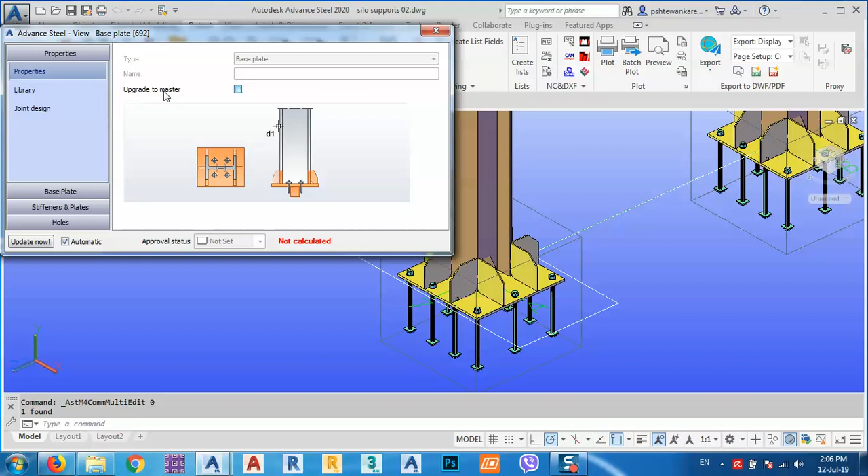In the previous lesson I forgot to remove the middle bolts, so if I change this one and upgrade to master, I can modify this joint from the parallel type and remove the center bolts. You can just click here and remove the center bolts.

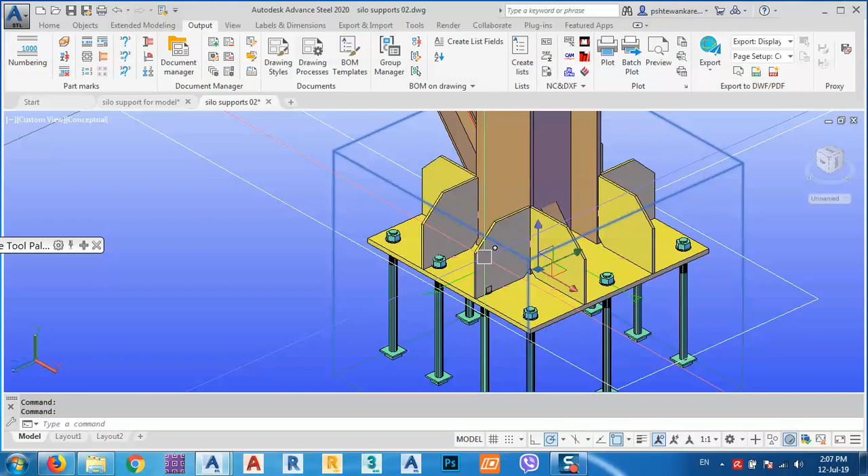We have some other mistakes. For example, I put only 2 plates here, but we need 3. There's nothing in Advance Steel to make this automatically, but you can do it by double clicking, removing these 2 plates, and placing other plates. We can do it later, it's no problem.

For this one, let me make these connections and show how. We can go to connection vault and use the one we need, which is from the platform beams.

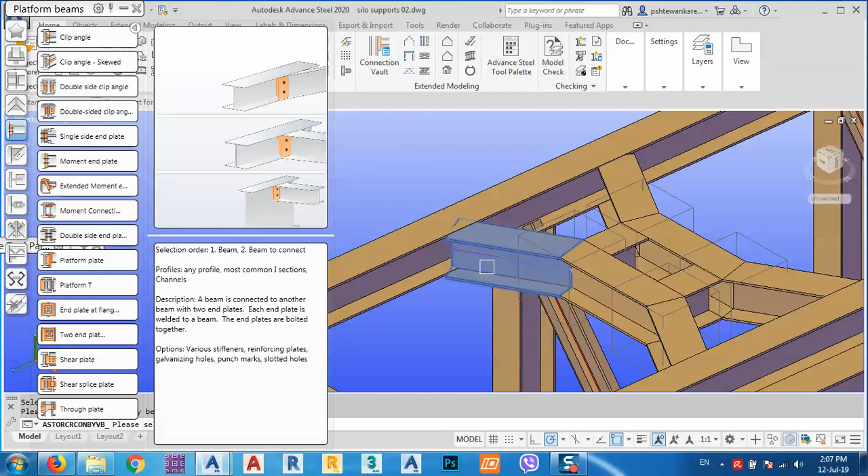We need the platform plate. You can just select this one and select the second one, but be careful because in the previous lesson we put on group selection.

Let me show you. When you click this one, it will select all the groups. In this situation you cannot make connections - just click here and here and it will not connect anything.

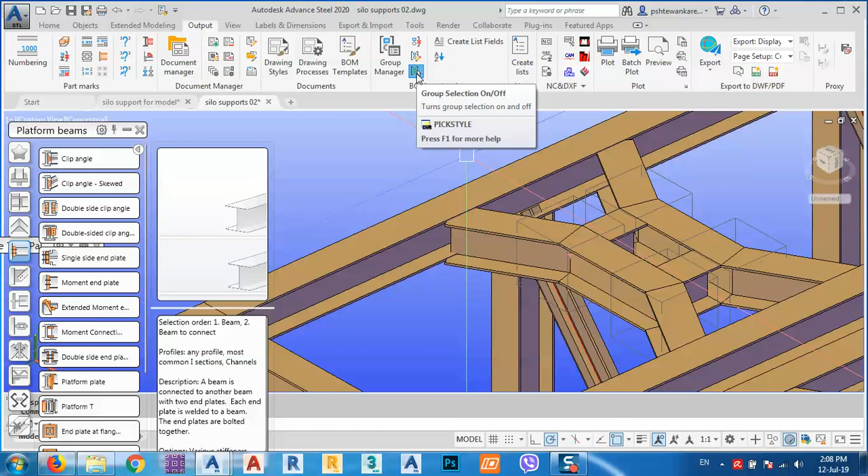So we have to turn off group selection, and after that you can go to platform plate, select this space and this space also.

After that we have to select this one. For example, the thickness is 12 millimeters, the bolts and holes grade we can set to 20, and we can select the bolt type - we can use UNI or any kind of bolts we want.

After that, horizontal bolts, its projection - we can see totals. So the width of the plate, or we can just use projections.

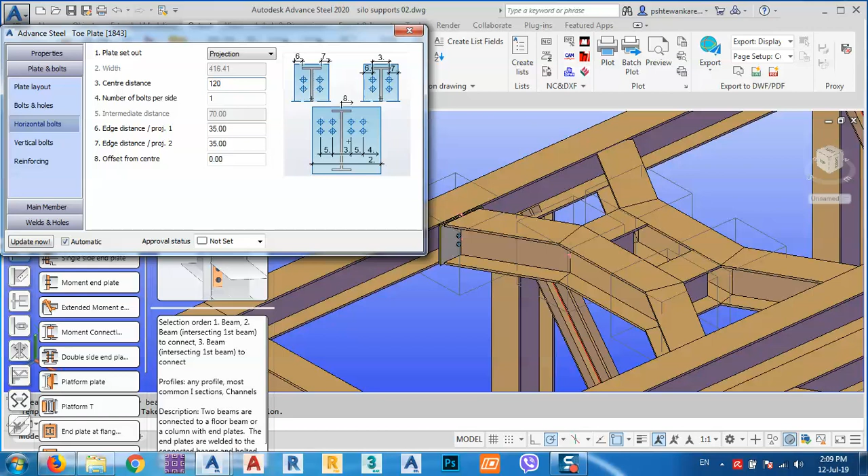This is the difference between the center distance - 75, maybe 120, or any other distance, maybe 200, I don't know, it's up to you, it's up to your design. And the edge distance is maybe 40 by 40 on each side.

From vertical bolts I want to put it in the center, and we have main - you see here we have 10 millimeters. I want the main to also be 12 millimeters.

And minus 25, we can change it to 0, or if we want 5 millimeters for welding, we can put it inside - sometimes you can put it inside, it's no problem.

You see these stiffeners. After that, from the end plate, this plate thickness is 10 millimeters, I think it's okay.

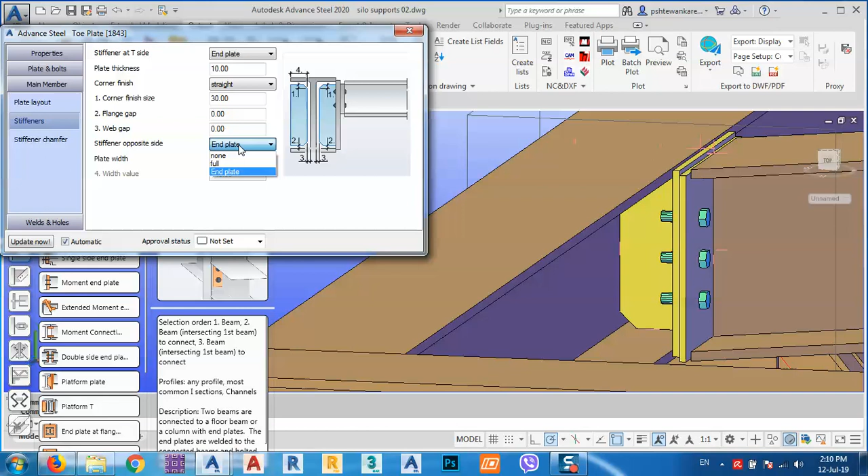Flange gap, we have stiffener opposite - we have too many things, and stiffener chamfer. If we want to give it a chamfer, we can do it. I think that's enough to discuss about it.

This is the plate layout with this plate. As you see in the picture, we can make it slotted holes or whatever we want. Here we have projections, we can say totals.

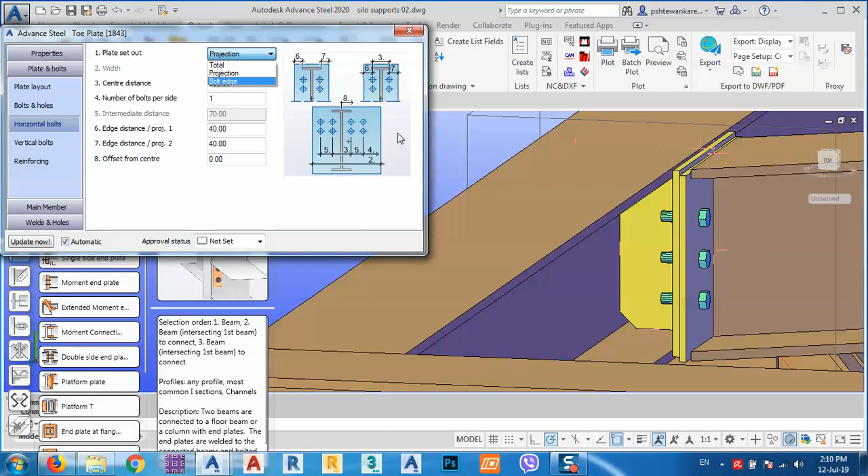If you see the projections, here we have 40, but we can make it 0 and 0 so it fits with this beam and line. Vertical bolts also, there's nothing to discuss.

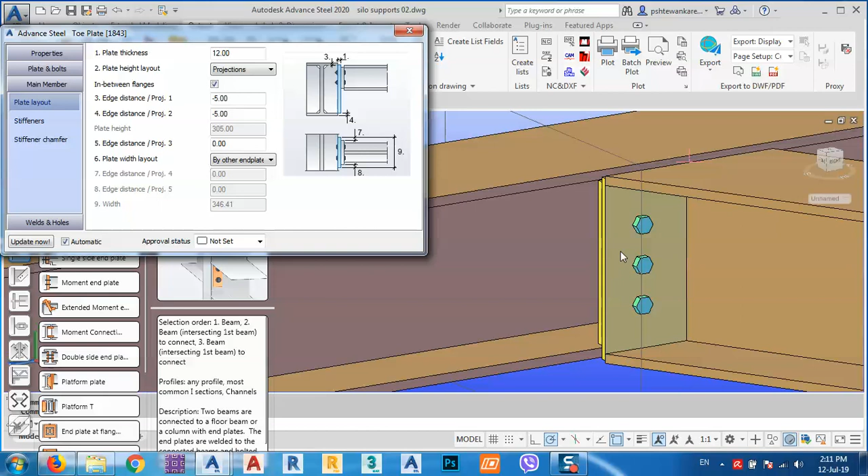After that we can go to the reinforcing group. If we want to make some washers, we can put them in between flanges - you see this small one to be between these flanges like this. I think our example is just like this, and this is okay.

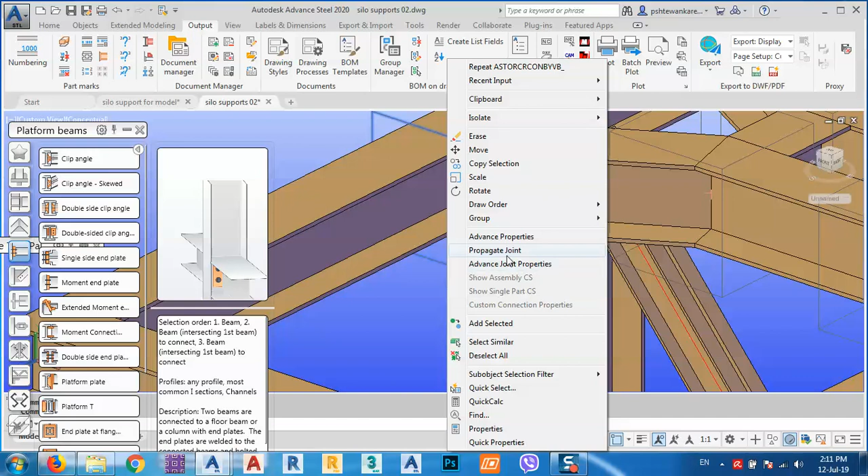So after that, I'm using Advance Steel 2020, which has a good upgrade - by right clicking and choosing propagate joint, this joint will be copied to all the other joints in the model that have the same properties. As you see, it needs some time, but every joint everywhere gets the same settings.

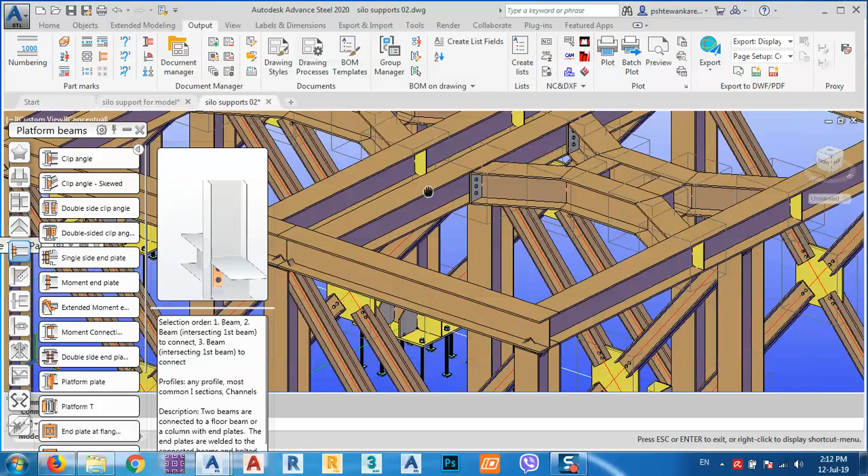Okay, as you see everywhere, all the joints have now become one group. If you don't have Advance Steel 2020, you can just copy

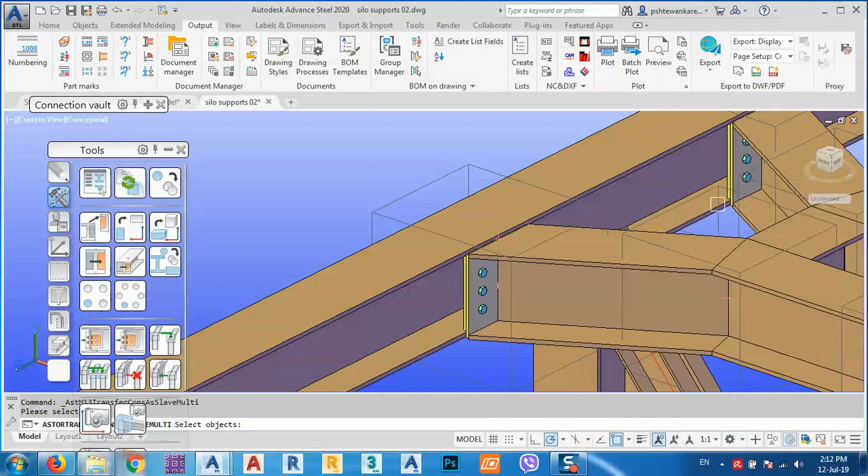and paste this group, this joint, from here. You can use this one. Just select this one, select one place or one bolt, then space, and select the beams that you want to connect. First the main beam, space, then the second beam, space.

After I finished this one, I can go back to group selection, so I select anyone to have all the groups selected. Okay, we have many other things, or many other joints.

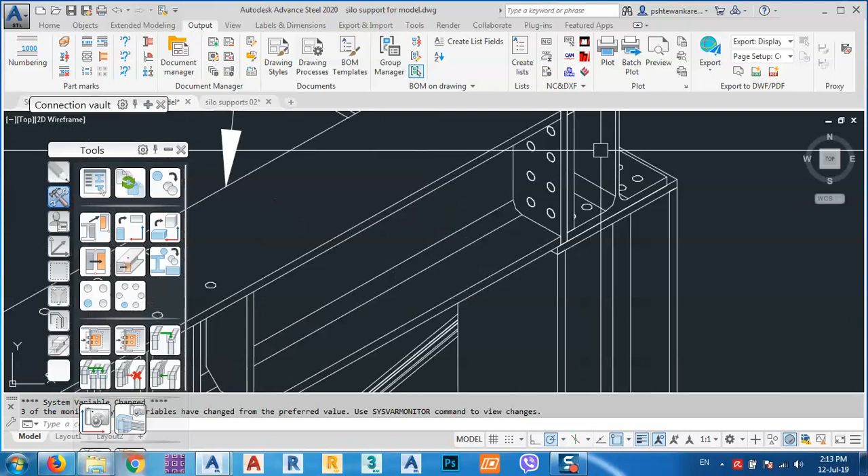For example, this joint. Let me go back to the model. This one, let's see what type of joint this is. It's the same, as you see here, it's the same joint. So I will always use this one again.

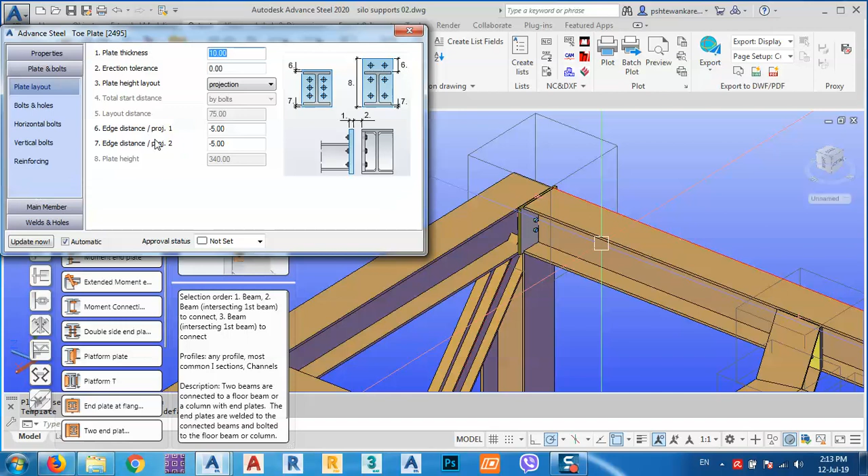So again, go to platform plate and select this one, space, and this one, space. With this one again, we can specify, but of course we have to bring all the information from here, from this plate. Let me see which side shows the plate thickness.

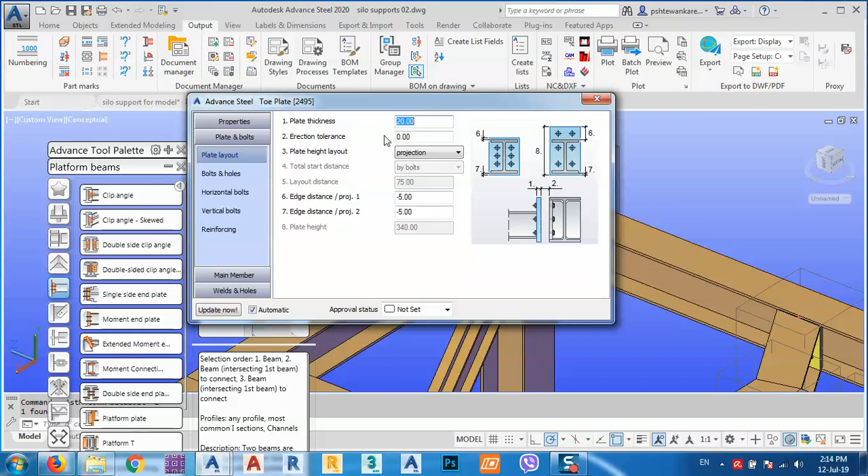Yeah, from here we can see the plate thickness. For example, how much is it? This is 20, okay, so I will put 20. I will put plate thickness 20. Right click, Advance Joint Properties, plate, I will put 20, and bolts and holes.

We have this one, or let me change it to uni, it's up to you which one you want to use, no problem. We have two numbers in horizontal, two rows, as you see. The intermediate distance is 70, maybe 50 is enough, or 60, I don't know, I don't want to waste time.

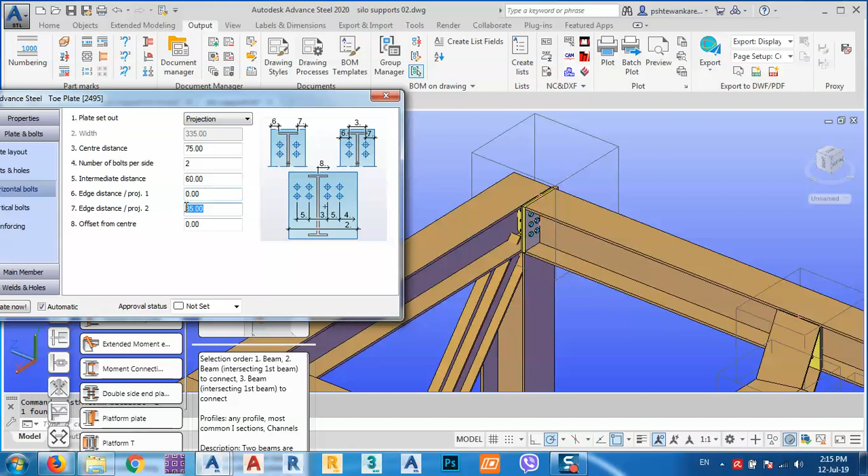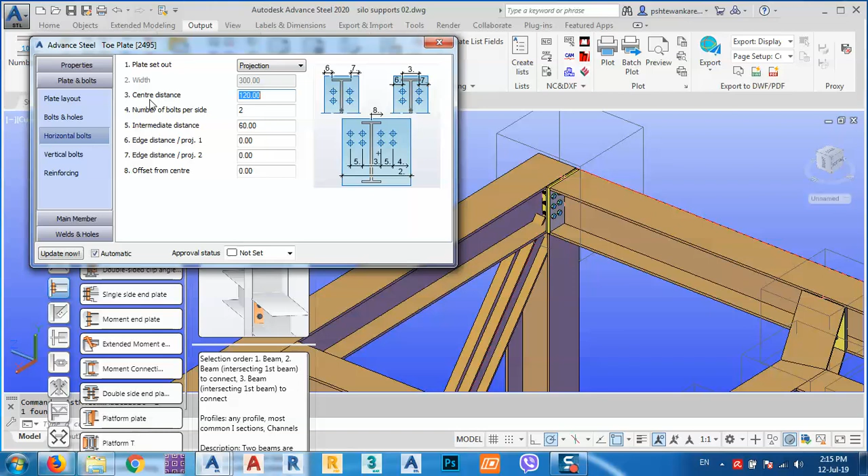So again, I can go to Advanced Joint Properties and put the horizontal distance between centers, and this is 120, just like we have. And how many rows in the vertical? I think we have 4.

Okay, I will put it in the middle or in the center, and again I have to bring this information for the dimensions. The space between them is 70, so I think it's just like we have, the vertical bolts, no, it's 75, so I want to give it 70.

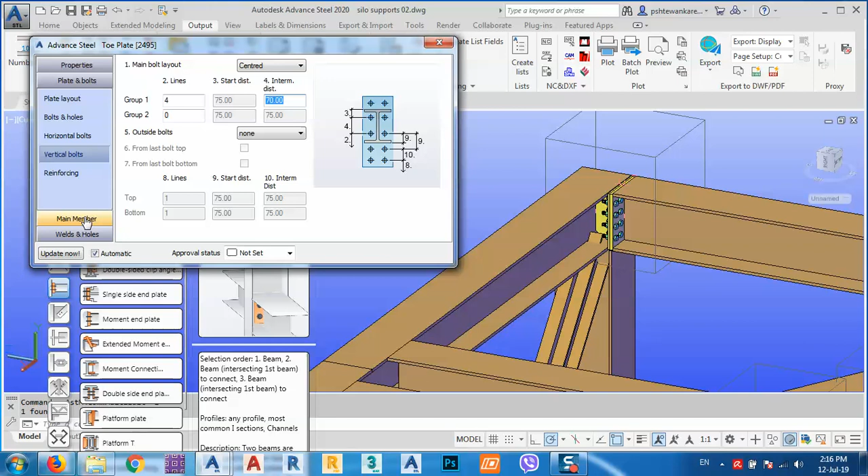That's very good, and the main one is the same thing, 20, and we want it in between, as you see here, in between the joints. So it's very good, after that click it. I think the rest is okay. The weld and holes, we want to put 4 millimeters. Okay, right click, propagate joint.

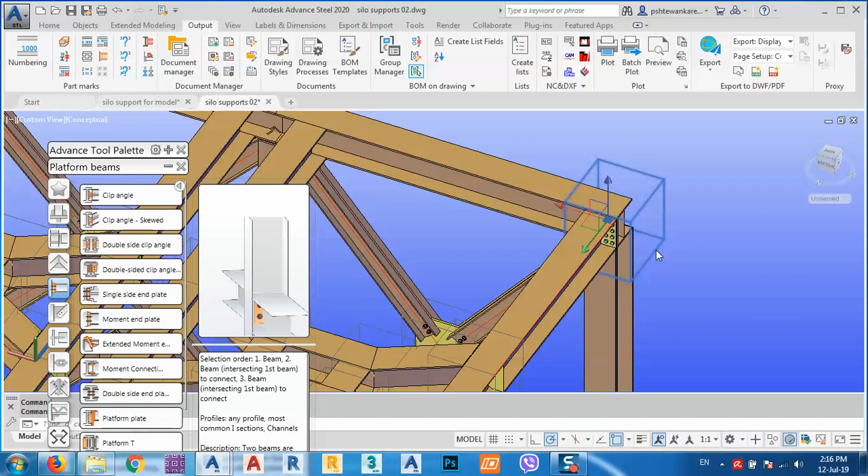Again, this cool thing in Advance Steel 2020. Again, if you don't have Advance Steel 2020, you can just copy and paste this joint. You can make anything that you want. So it's a very cool thing.

Yeah, now I think everything is okay. So it's very good, we could get this connection and this connection. The remaining thing is what we have. We have these connections, first I want to finish the connection for the beams.

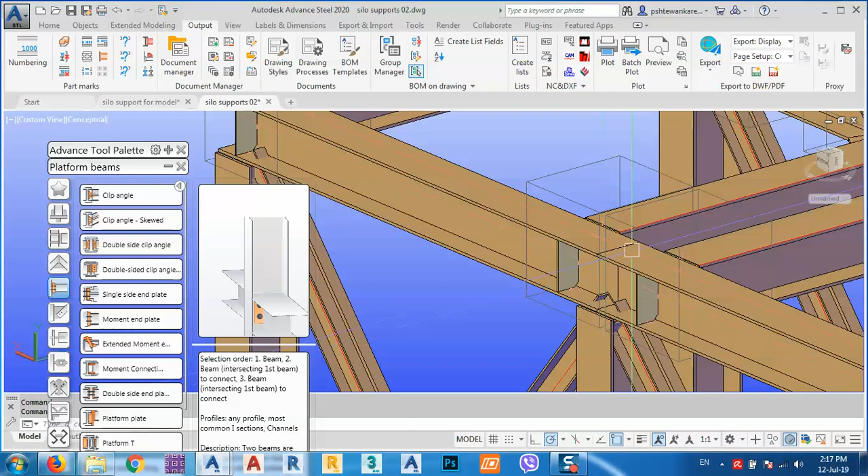Okay, we have this connection, so we can go back to our joint, and you see again this one is the end plate. So for this time I'm going to use a plate, but this time it should be splice, so we have front plate splice.

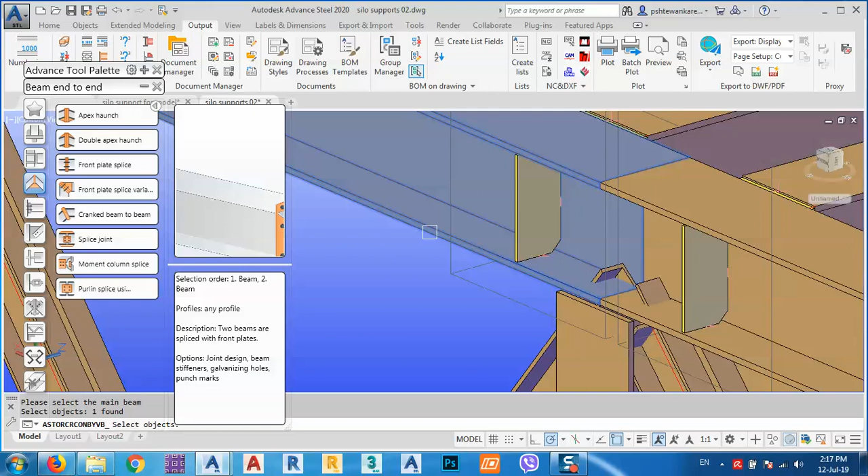Select the first one and space, select the second one and space. Yeah, it's just like this. And what we want, plate number 1 is 20. The plate width is how much, and the plate height should be the exact same as the beam, so 360, and it should be from center.

Okay, projection top is 0, I want to put 0. Okay, as you see, just like this. This is the dimension of the beam.

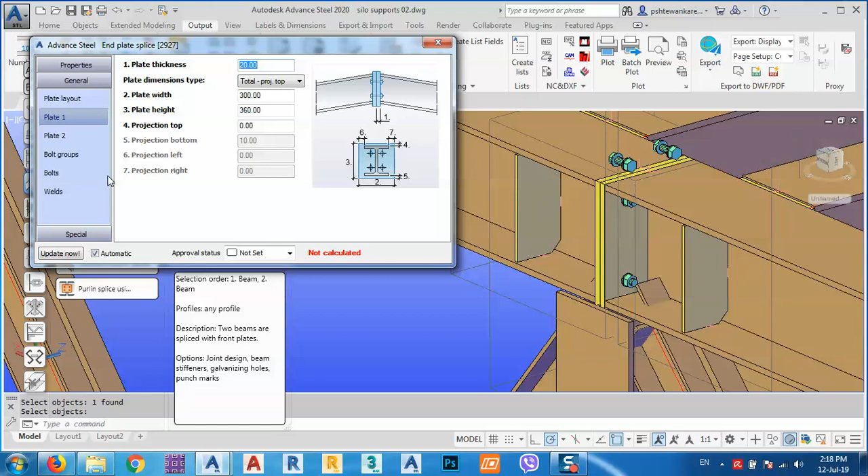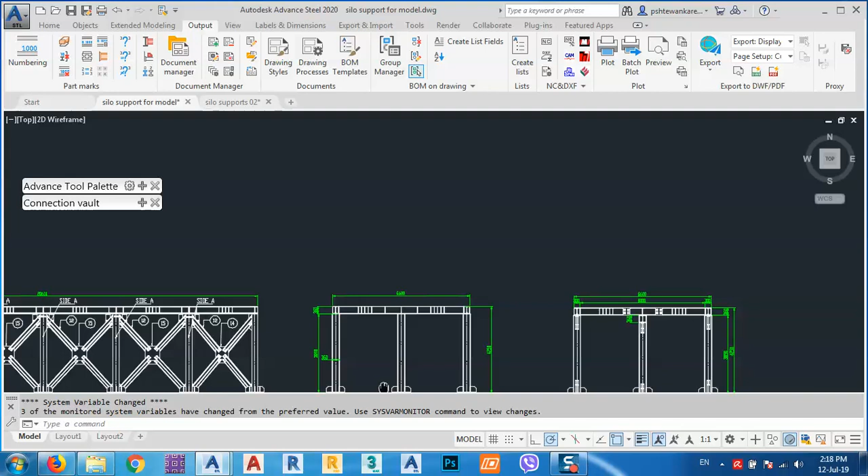Bolt groups, what we have is one bolt group, or number per side, we have 1, but we have 2 per side. The gauge distance, we have the intermediate distance between them, the gauge distance, which is this distance. I have to bring all this information into our model. How can we see this, we can bring this information here, but if we have, where is this information, which side can we bring it? I think there is some missing data.

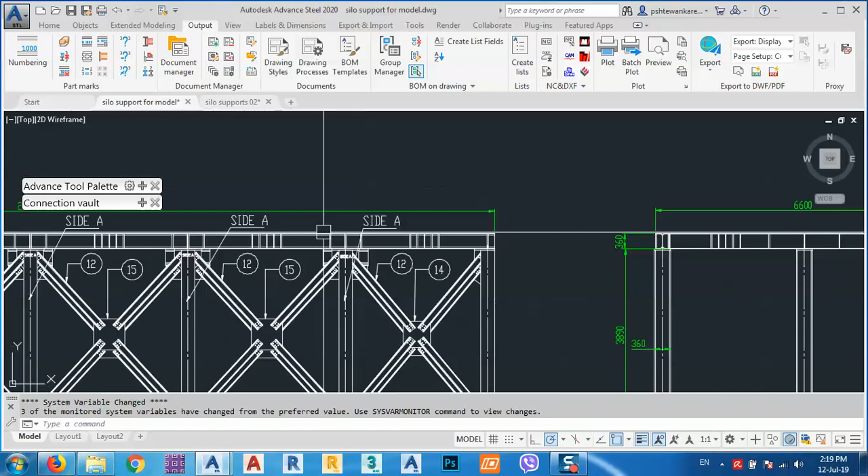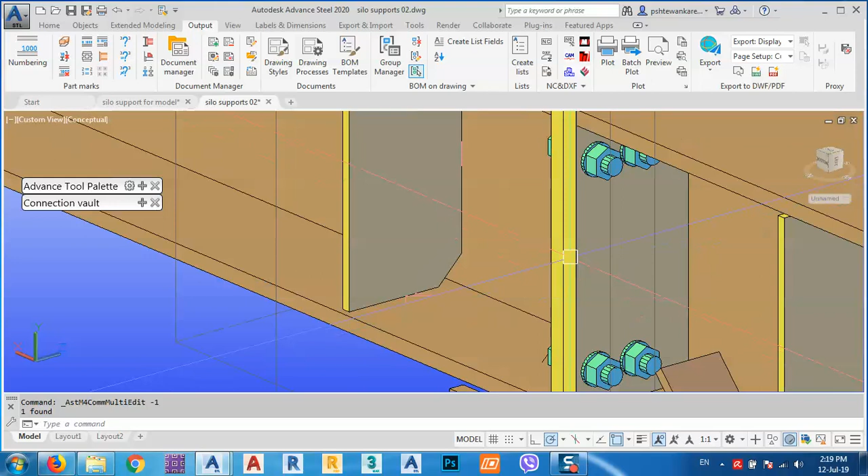Anyhow, we can specify some. No problem, this is not enough because we don't have any joints here, but we will put something by ourselves. As you see, 150. Just click here and right click, Advance joint properties. No, not this one. I can just select one plate and right click Advance joint properties.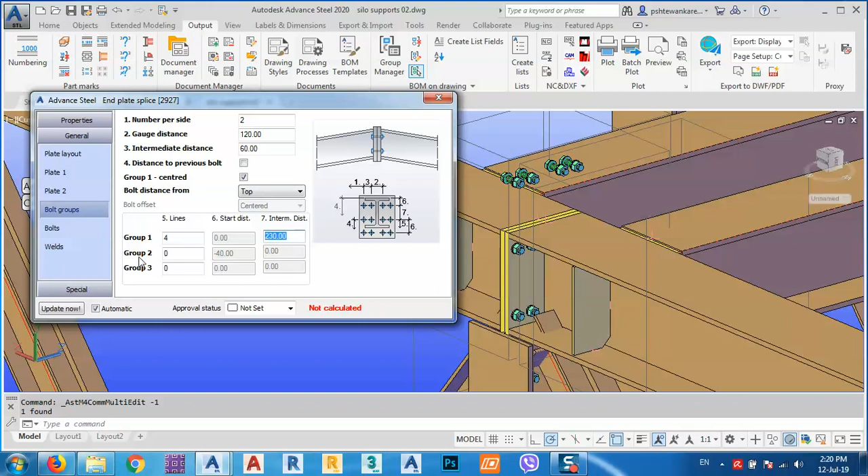After that, what we have, bolt groups. We have one bolt group. I didn't want to put anything here, so just bolt distances from top or from bottom. I will put 120 just like before, and the distance is maybe 60. As you see, we have 4 numbers, and the middle, let's say 60 or 70, just like before. Yeah, I think now is okay, it's just like before, I think, yeah, it's just like it is, just like before. So bolts we have M20, and welds also again we can say 4 millimeters.

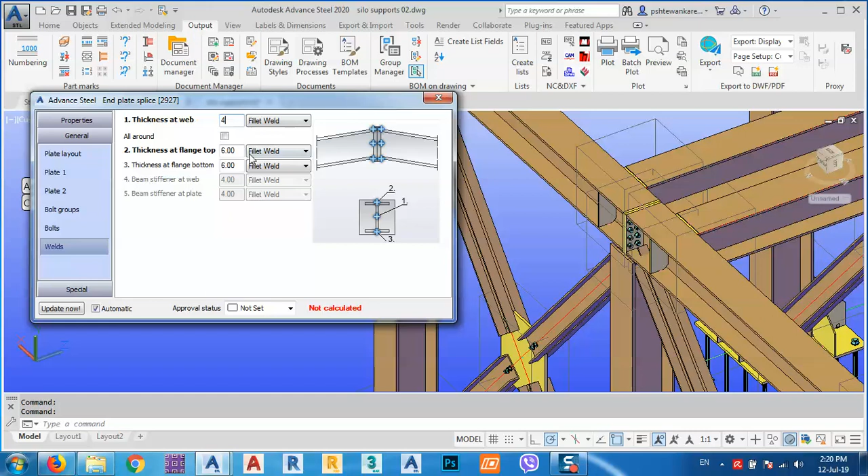You have other things you can change it, just change it, no problem. Let me see this one. Yeah, this is a joint box for this one, so just right click and again propagate a joint so as to be copied to all the other joints.

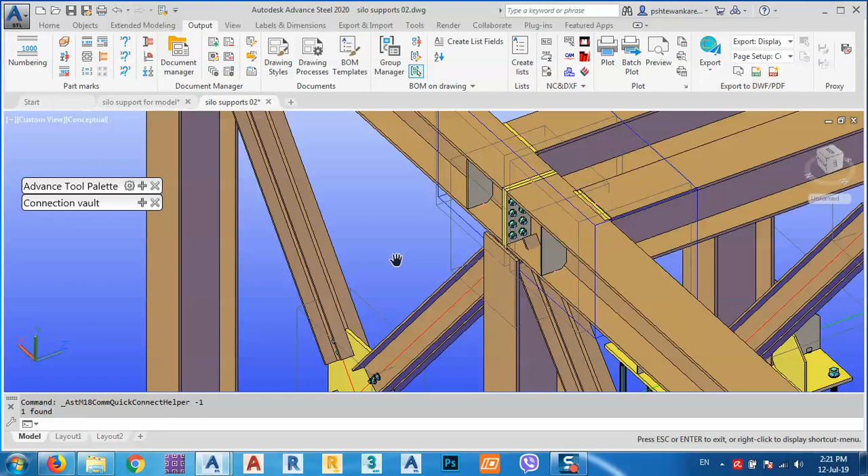Okay, so we have this one, and we see, yeah, it needs some time. Step by step our model will be heavier, and it needs some other good computers. You see, every time I think it's okay. So we have many things that we did.

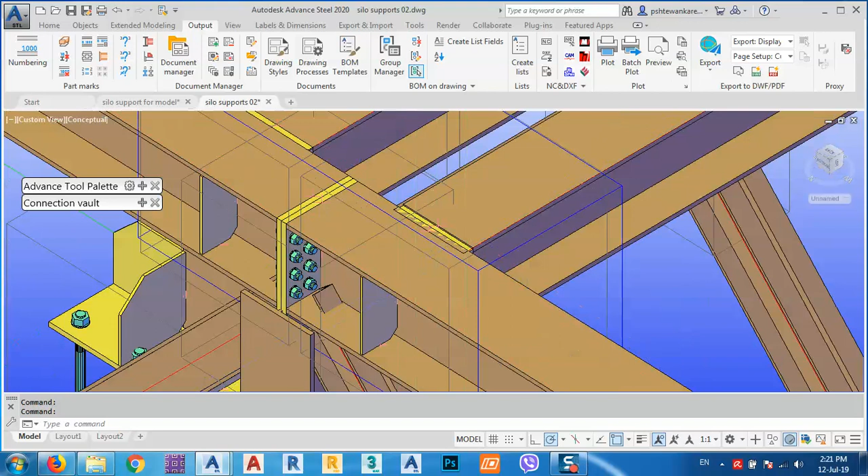Okay, again we have some joints here, we have to make it. We finished this one and this one, and now what we have is this beam with this column. As you see we have this beam with this column. Again we have to put some joints, also for the middle one.

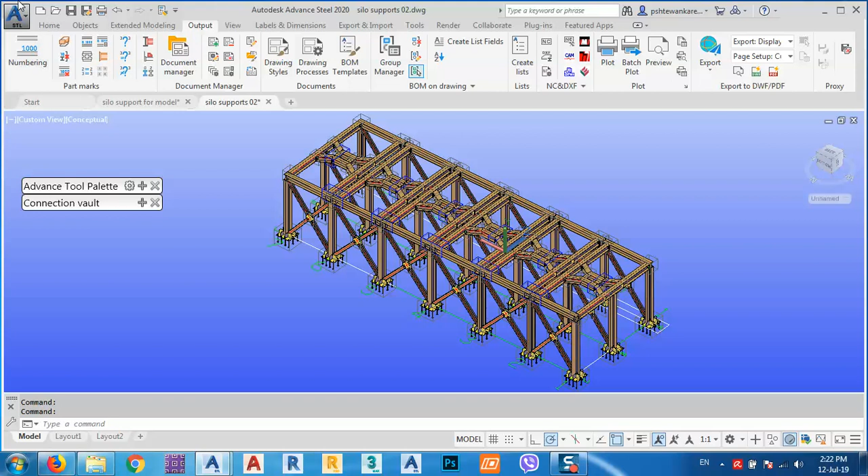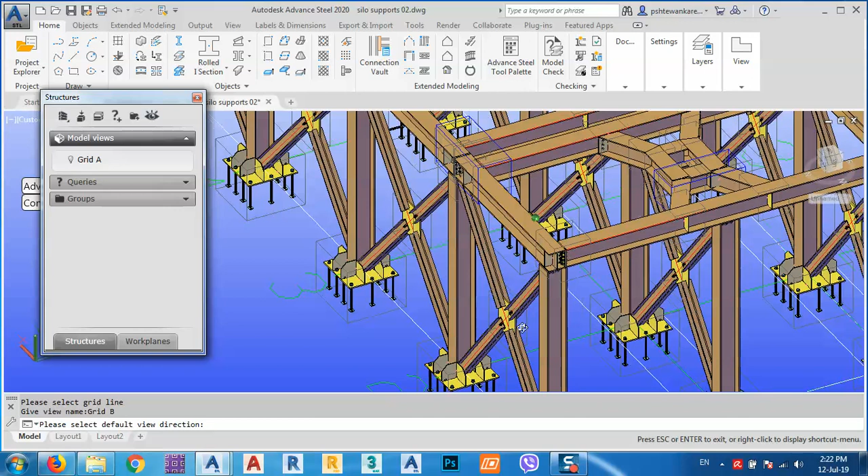You see, now I cannot see the middle well. So what I have to do, I can go to project explorer, and I can create a model view. So from grid lines, I just select this grid, enter the grid name, let's say grid B, and enter. After that I have to select an arrow, which is the direction of my view. So where is the direction? Yeah, here, for example, I want it from this direction, just space. After that I can double click here, and it will go to this view, so I can see this view very well.

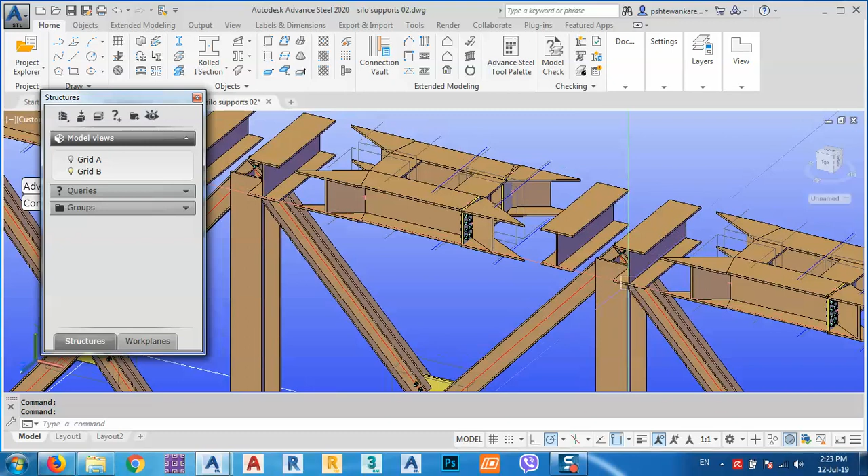As you see, it's just like this. But as you see here, I have these two beams, I cannot connect it. Even if I go back to my model, I can see that this is connected with a beam, whereas this, yeah, so they put this beam segment. That's why they could do this connection, connecting this beam with this beam.

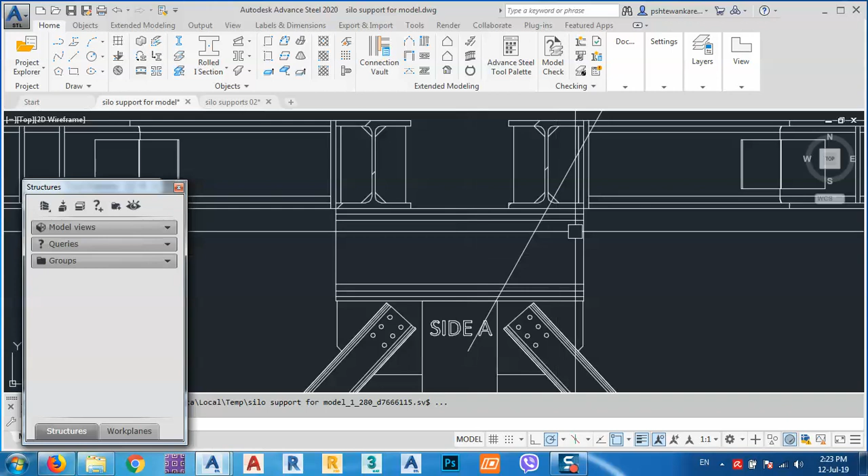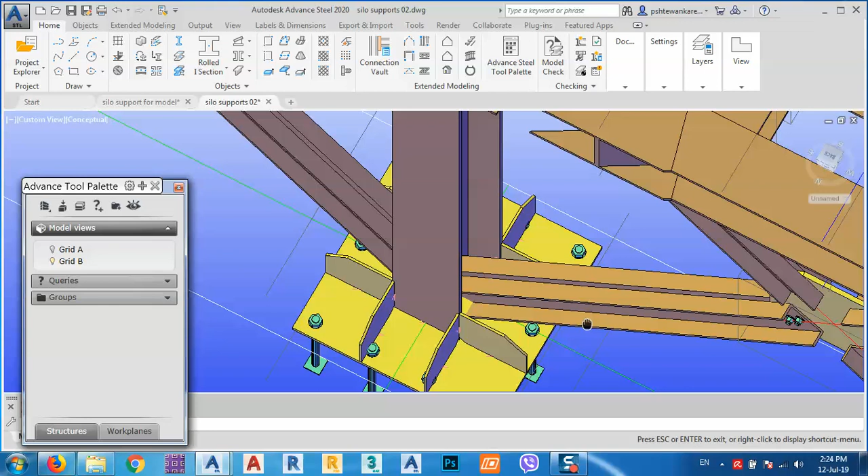Anyhow, we have many things we can make. We have these connections, but I want to make all of these joints in the next lecture, so as not to make this video too long. As you see, we created this gusset plate, with 2 bolts.

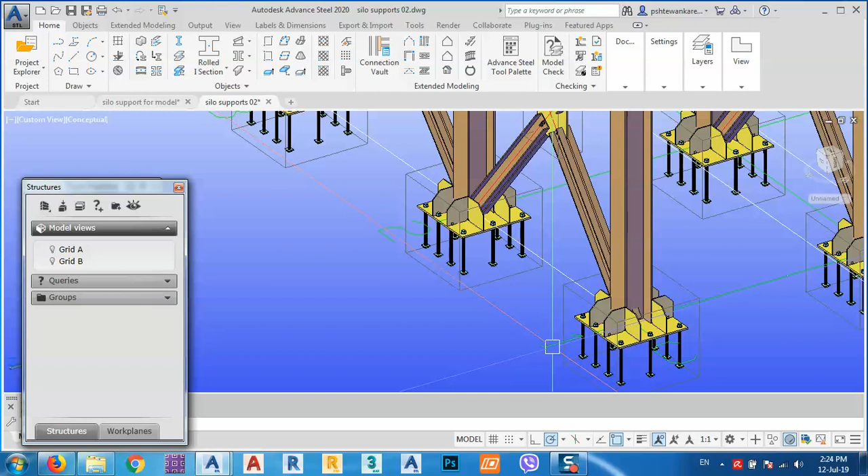You can change whatever you want, okay. So the tricky point in this model is every time we have to change, we have to make grids. As you see, I can make grids, model view very easy with grids. Okay, so don't forget to make grids every time.

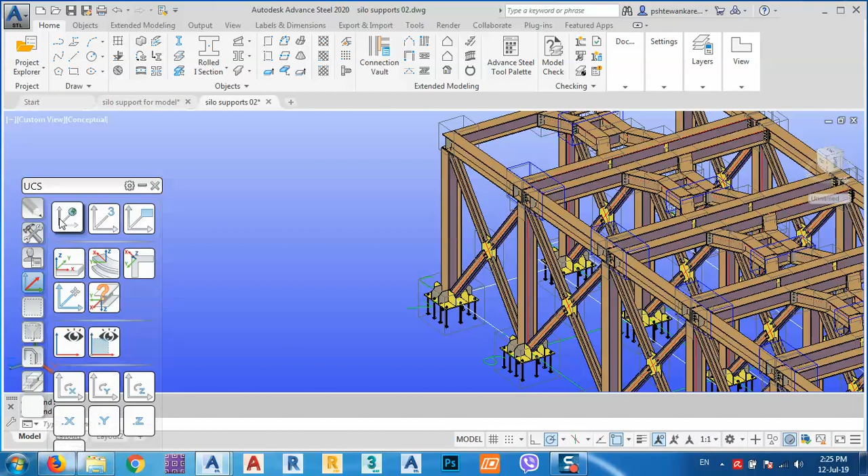You see, we have some places that go down, how can I make it? I can just select one of them, or first let me change back the UCS to the world, so I can see here. Let me select this one, right click, advanced joint properties, and upgrade to master.

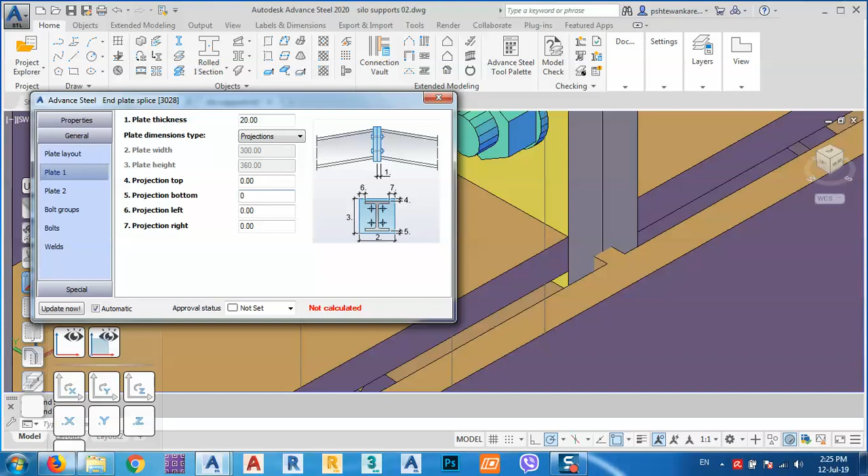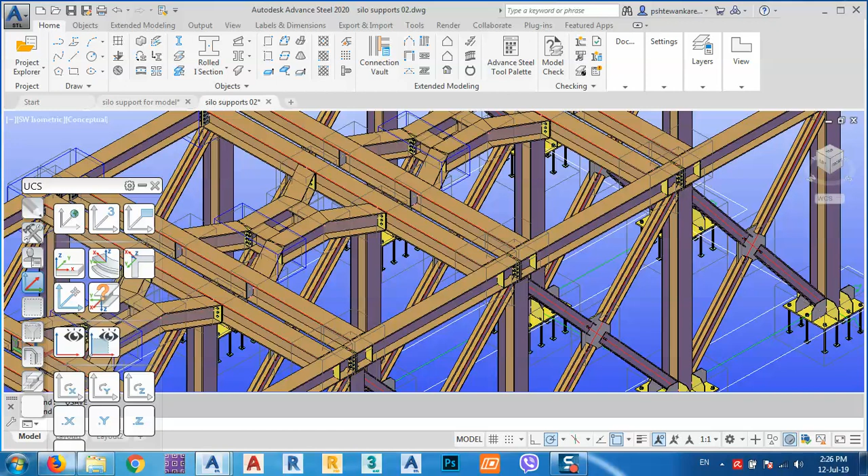As you see, it needs some time because there are many joints that change together, since I used propagate joint. Just let me save this one, and you see, this is the benefit of propagate joint, every joint changed with one click.